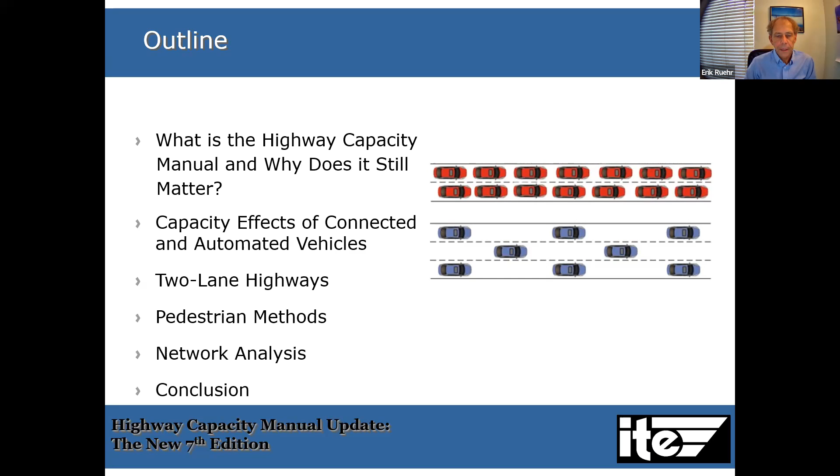And then I want to talk about the 4 areas, the key areas where the 7th edition has changed what's going on in the manual. Those being capacity effects of connected and automated vehicles, new 2-lane highway procedure, pedestrian methods, and network analysis. And then I'll have a few concluding remarks about the Highway Capacity Committee that maintains this manual.

So just to see where the Highway Capacity Manual fits, I put this slide together, which gives you my ideas on what are the key things that transportation engineers and planners do. And so, first of all, safety, that's probably the most important thing any of us does, and needs no explanation. How many people or vehicles are using the system now? How's the system operating is an important thing that many of us focus on.

Some of us focus on how many people or vehicles will use the system in the future, traffic forecasting. What is the effect of the system on the environment? Very, very important in California with CEQA. What is the capacity of the system? How many vehicles, pedestrians, bicycles, or whatever can fit into the system and allow it to operate adequately? And then what is the experience of the people who are users of the system?

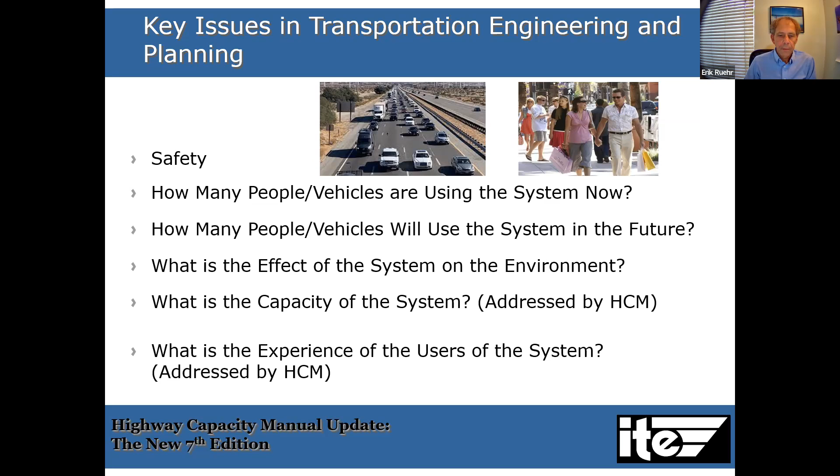So the last 2 of those bullets are addressed by the Highway Capacity Manual, and it is one of the key places to look for answers to those 2 questions. So also you can think about what are the other ways of looking at capacity and quality of service. So we've got the Highway Capacity Manual, you've got software, computational engines. Something like Synchro would be an example of a computational engine that's different from the Highway Capacity Manual, that provides similar answers.

And you've got traffic simulation, a number of traffic simulation programs that look at the same issue, highway capacity, but in a different way by simulating the vehicles and pedestrians and bicycles and how they interact with each other. And then I put other to sort of represent everything else, but the thing I would think of most is these back of the envelope calculation tools that many of you use, that if you just want to get a quick answer with paper and pencil or a calculator, you can get an idea of the capacity of a system very quickly just using sketch planning techniques.

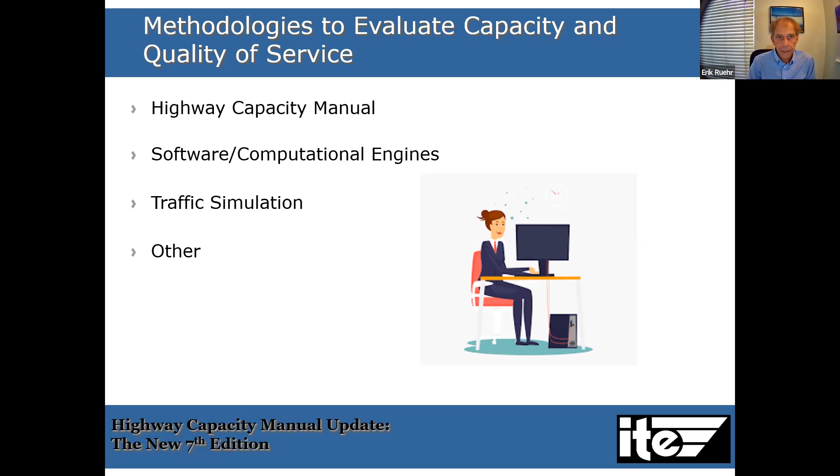So the Highway Capacity Manual has been around for a very long time. The first edition was in 1950. That was way before my time. New editions were published over time, roughly every 5, 10, 15 years or so. Previously the editions were noted by the year, and now we're starting to try doing 6th edition, 7th edition, but I think people like the years, and we may go back to the year of the Highway Capacity Manual rather than the edition. So we'll see how that goes.

The Highway Capacity Manual is maintained by the Transportation Research Board's Committee on Highway Capacity and Quality of Service. So there's a whole committee that focuses on this topic and maintains this manual, answers questions, oversees updates. The Highway Capacity Manual is supported by research. That's one of the things that distinguishes this way of calculating capacity from other ways, is that it's very research-based, it's very visible. You can see how the calculations are done, see what they came from, see the background studies. And so that sort of distinguishes it from some of the other ways of doing this.

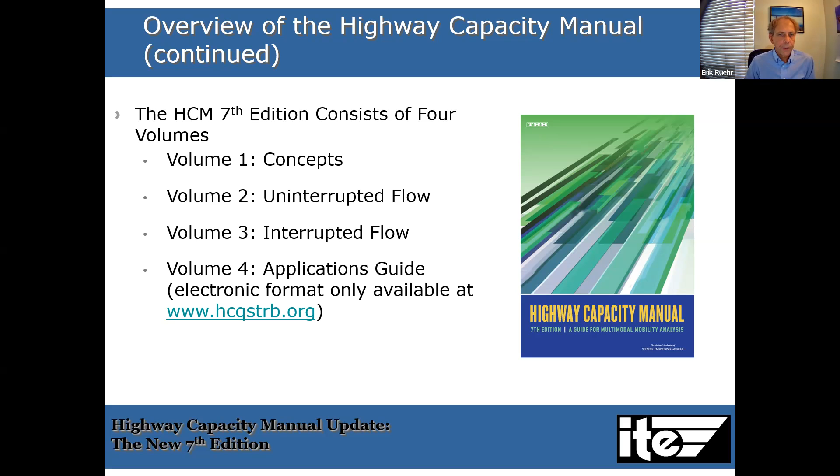And then volume 4 is applications guide and background materials. The first 3 volumes, you actually have to buy those from TRB or ITE or whoever sells them. They come either in a printed book or in an ebook you can read on your computer. Volume 4 is a website, so that one is available to everybody, and you can get it at the website I'm showing here. I understand this presentation will be available afterwards, so you don't necessarily have to write down the names of the websites. But Volume 4 is open to viewing from anyone, whether you have purchased the Highway Capacity Manual or not.

So with that, let's talk about the ways that the 7th edition is different from the previous editions. And I'll start with connected and automated vehicles. This is kind of a fun one because you get to think about the future and automated vehicles and so on.

This topic came about because the first agency that really got interested in this issue was the state of Oregon, because decision makers were asking them, hey, with connected and automated vehicles, we're reading about all this stuff, and they're going to operate more efficiently, and maybe we just won't need to widen roads anymore because these automated vehicles are going to be here anytime now. And the state of Oregon, as well as many of us, said, well, not so fast. It's going to take a while for these things to be implemented, and we haven't studied the capacity effects. So the state of Oregon set up what's called a pooled fund study, and they got many different states to chip in and do some research. And so the new procedures in the 7th edition are based on the research that was led by the state of Oregon and supported by many states.

The different procedures are based on simulation, of course, because you can't go out and measure how a connected and automated vehicle works. We could probably measure one, but you couldn't measure many of them operating in a system. So it's all based on simulation with assumptions about how the vehicles will interact with each other and how they'll interact with non-automated vehicles as well.

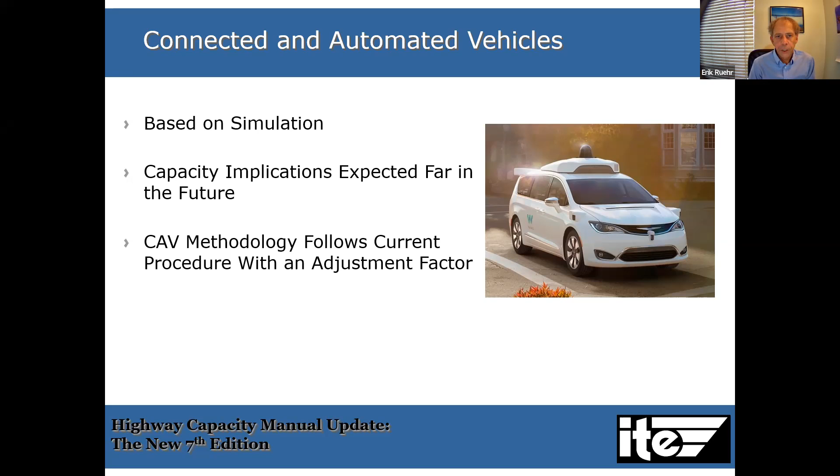And so how this works is what we call the CAV methodology. It follows the current procedures, but with an adjustment factor. So you basically would go through the procedures that you go through right now for signalized intersections or freeways or whatever you want to do. And then there'll be an adjustment factor at the end. And I'll show you a little bit about what that looks like.

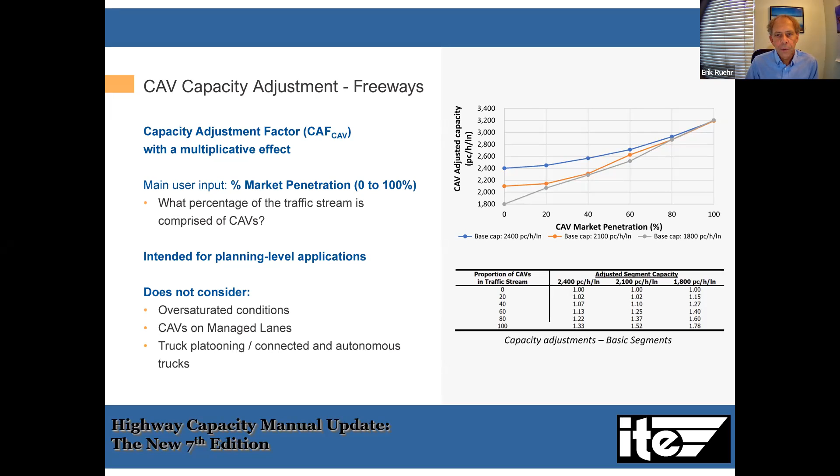But even independently of the Highway Capacity Manual, many researchers have kind of come to this conclusion that maybe 30% or thereabouts is kind of the average. There's a lot of variation, but that's kind of the average increase in capacity that you might see. And the other thing you might note is that if you do have a facility with obstructions or narrow lanes or whatever it is that would perhaps reduce the capacity for human drivers, the automated vehicles don't have that. So you can get bigger increases on facilities where you've got obstructions or other kinds of impediments to capacity.

So next I'm going to move on to two-lane highways, and the new HCM methodology is part of a new research project, and it just looks at two-lane highways differently than has been done before. And two-lane highways are one of the areas of the HCM that have been sort of problematic over the years. Things like signals and freeways, those have been figured out pretty well, but some of these different facility types kind of continue to elude us in terms of really understanding how they work.

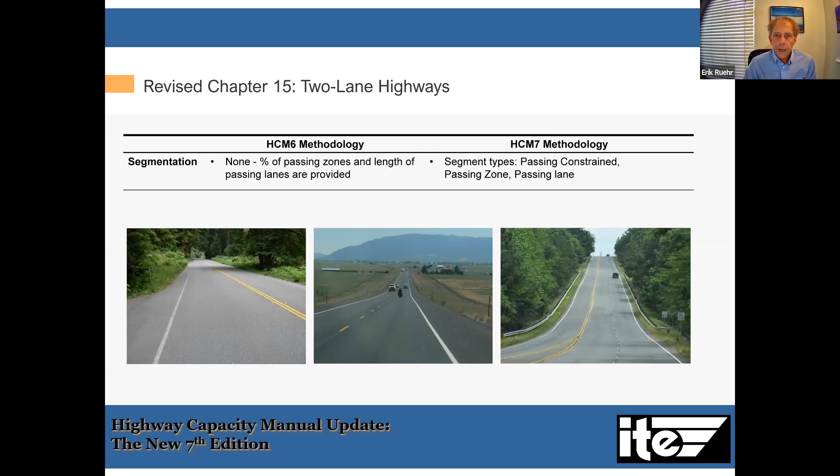So the first thing you do with the new methodology is you look at which type of roadway you're on, and the procedures are different depending on which type of roadway. And what we've seen is that vastly improves the accuracy of the 2-lane procedure.

Another thing that has changed, there are many sort of details, but another big thing that's changed in my mind is the way that heavy vehicles are treated. Previously, in the HCM6 methodology, heavy vehicles were treated as passenger car equivalents. So you just figure is a truck worth 2 cars, 3 cars, whatever. Now, the percent heavy vehicles is a direct input. So a 2-lane roadway, we figure, is going to operate differently whether it has 1%, 5%, or 10% trucks. And that's another big change that you see in this procedure.

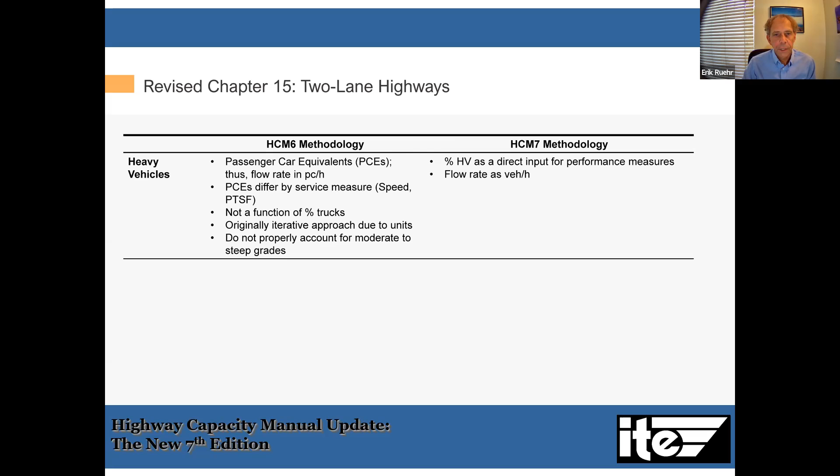So then let's talk about pedestrians, both at mid-block, unsignalized, and then signalized intersections. And the way I would describe what's new here is to talk about the history a little bit. Going back many, many years ago, the pedestrian procedures were based on just the sheer number of pedestrians you could fit into a given space, like a crowded sidewalk, for example. And that was really only applicable in places like New York City or downtown San Francisco, where you have lots and lots of pedestrians.

And that was felt to be all that was needed at the time. And as we progressed forward, some of the procedures in the early 2000s were oriented more towards the pedestrian's experience, and what is the pedestrian's experience of being on the roadway? Is there a lot of traffic? Is it close by? Is the sidewalk wide enough? So on and so forth.

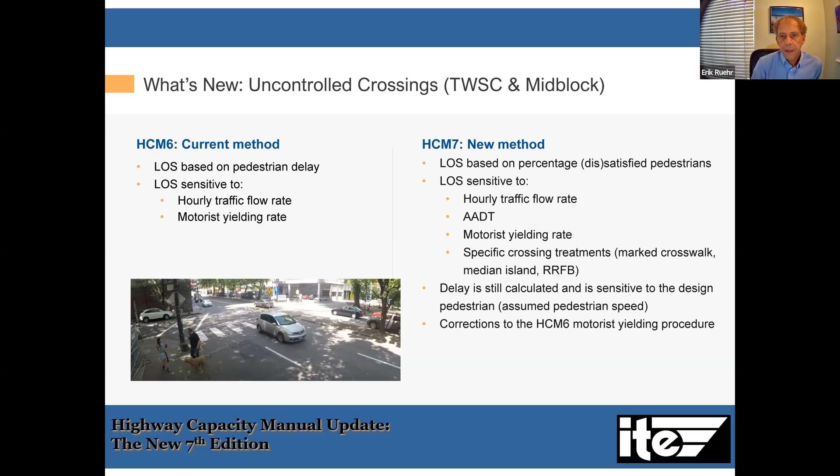Now with the HCM7, it's kind of a combination of both, where if you have a capacity problem with the pedestrians, that's going to be reflected. But also if there are user characteristics where the pedestrian doesn't feel comfortable or has a long delay, all that's factored into a score that tells you what the level of service is for the facility.

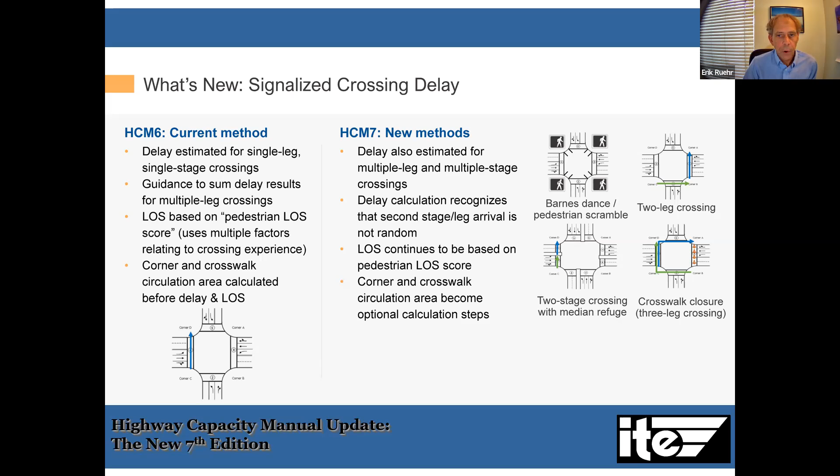And in addition to that, at signalized intersections, the HCM7 expands the universe of signalized intersections. So the HCM6 was kind of focused on individual intersections and crossing one leg at a time, whereas with the new HCM7 method, you can look at diagonal crossings. The Barnes dance is what those were called, or perhaps still are called, or multiple crossings of the intersection. So you can look at something like what happens if you prohibit pedestrians on one or more approaches. What would that be like for the pedestrian's experience?

And if they're operating at relatively low capacities, that's probably not a big deal. But if there are high delays, queuing, and so on, spill back onto the facilities, that's going to be felt by the user, but it's also a safety and operational problem. So it's a very big concern among agencies that maintain roadways. And so this procedure now looks at that problem in a step-by-step way, calculating the queues and what the effects are on each facility.

This is something that's been done historically, probably mostly by simulation, but with the Highway Capacity Manual procedure, you get a different perspective on this, where you can look at the nuts and bolts and the individual interactions of the vehicles and facilities and kind of get insight into how everything works.

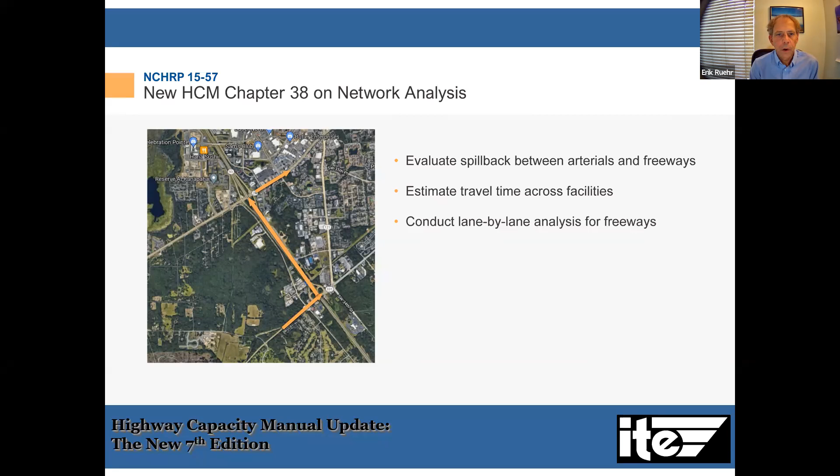And so this is just a different way of diagramming out what that looks like. Each of the facilities is mapped out with the number of lanes and the distance between intersections, keeping track of the queuing and so on. It also keeps track of travel time as a common performance measure, so you can look at the individual user and the trip through the network, in addition to how the queuing affects the different systems.